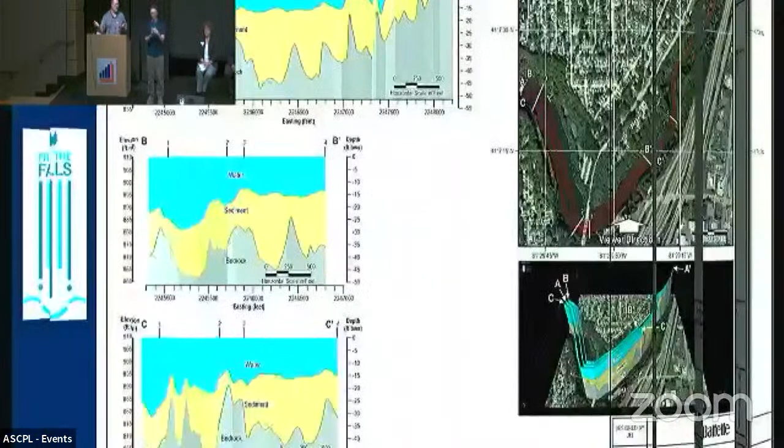And we came up with a cost at that time, I believe it was 77 million dollars we thought it would be. And we had a meeting, and as time has gone on, obviously those things have changed. But we continued forward because we had both P's: we had patience and we had these partnerships building up.

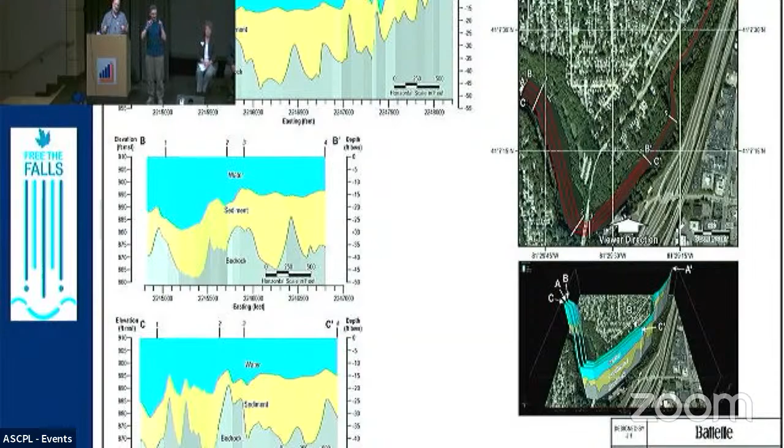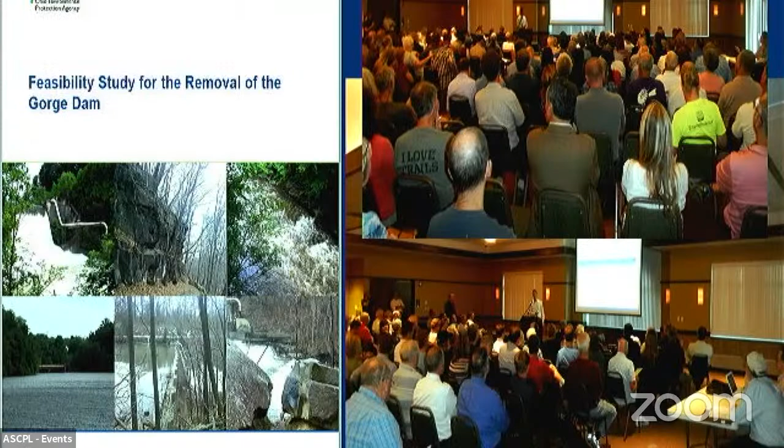As we move forward, we started asking very seriously, how do we achieve these things? So last year, we were able to go to the US EPA office in Chicago and make our pitch: hey, we got a cool project here, how much do you really want to partner with it?

And we did an application. It was reviewed, and where we are is with our partners, and we want to make sure we understand that none of this is possible without a common vision, which is let's invest in the river and restore it. The city of Cuyahoga Falls, the city of Akron, Friends of the Crooked River, and Gary Whidden were at the very beginning of asking when this was still something most folks would call a pipe dream. Summit County Metro Parks, the County of Summit, the Lake Erie Commission, and Lynn Garrity—without her emotional support, I think I would have buckled years ago. Ohio EPA, the state of Ohio, First Energy, the Regional Sewer District, and the US EPA—without this collective partnership, nothing would be possible to move forward.

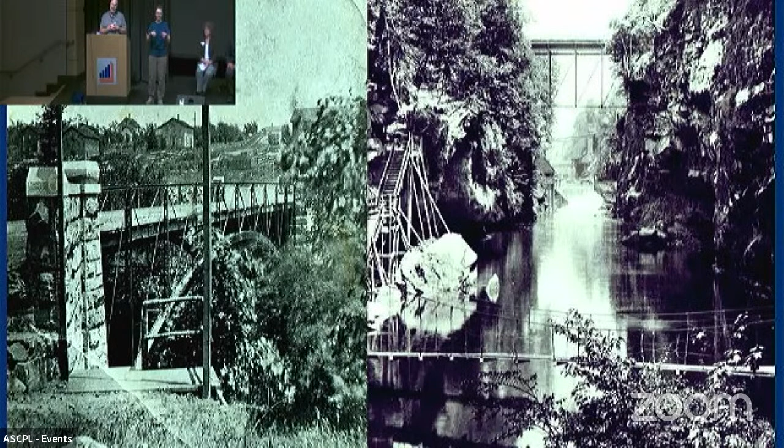So with that common vision and investment, it is my honor to say that as of right now, we have a signed project agreement, and this project is able to move forward. Our partners have come together and funded it, and through this funding, we have everyone in agreement that we want this project to happen.

I'm wearing my When Pigs Fly socks, because Steve Tuckerman and Bob Wyszynski, the folks who mentored me, that would have been their answer had we asked this question 30 years ago. But it is amazing to think of the work that has been done, and even more amazing to think of the work that will be done, and all the support that folks have given us to encourage this project to move forward, to restore the Cuyahoga River to what was once the most visited natural area in the state of Ohio.

So with that, I am going to introduce Mayor Horrigan, who's going to give some additional remarks.

Listen, the name Bill Zawitsky lives in memory for a lot of reasons, and for good reason too, because early on—not to give you a history lesson, but as we've had these—go ahead. Go ahead. That's twice. It's okay. I think I can pick back up.

Flowing southwest from its headwaters in Geauga County, the river encounters a large deposit of bedrock in Cuyahoga Falls, forcing it to make a sharp U-turn before finishing its journey to Lake Erie. With rocky outcrops, caves, and dramatic scenery, the area where the river turns towards the north has attracted visitors for more than 150 years. Coming from near and far, outdoor enthusiasts once flocked to the gorge to view the big falls of the Cuyahoga and to enjoy the amusement park rides, dance halls, picnicking, and more. That tradition continues today at the 155-acre Gorge Metro Park.

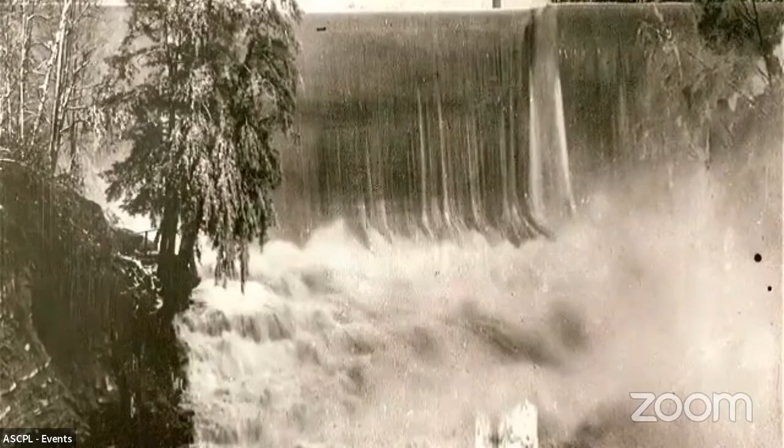But over the years, the river has faced serious challenges. In 1911, the massive Gorge Dam was built to support electricity generation for streetcars and city lights. Its construction put the famous Big Falls underwater and forever altered the landscape of the gorge. In the 1950s, the Cuyahoga had become a virtual sewer.

As the region industrialized, the river became extremely polluted. Like other rivers around the country, the Cuyahoga between Akron and Cleveland became a convenient dumping ground for raw sewage, industrial waste, toxins, and polluted runoff. Thanks to the Federal Clean Water Act and the entire Cuyahoga River community, the river has largely recovered from its polluted past. But the Gorge Dam remains.

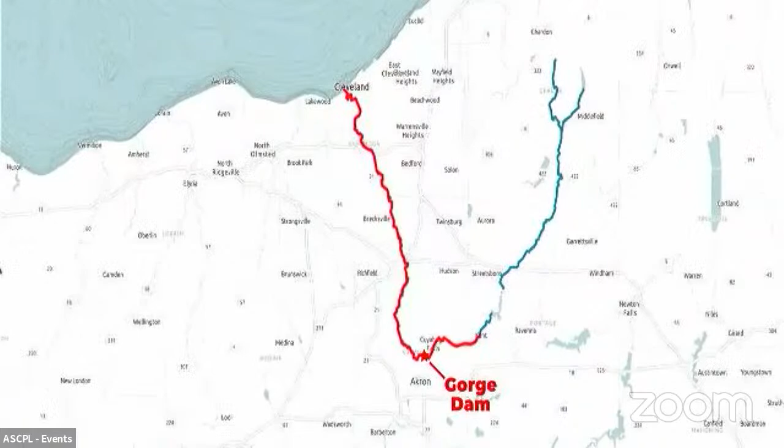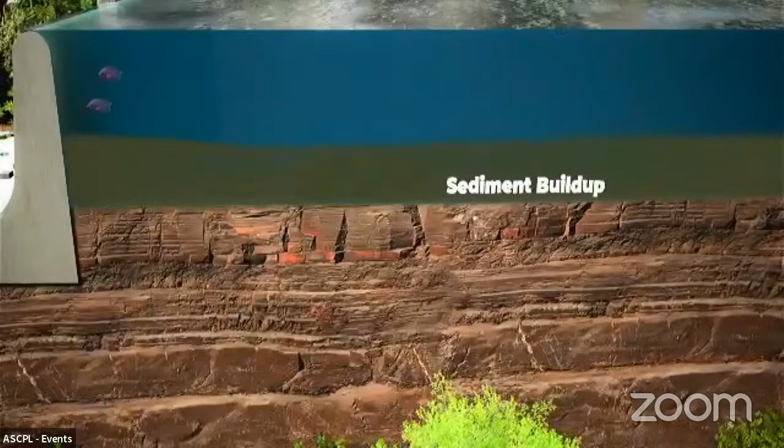Today, the 58-foot-high, 425-foot-wide remnant of the past serves no useful purpose. In fact, the dam is the only thing standing in the way of a completely free-flowing Cuyahoga River from Kent to Lake Erie. Even though dams were built with good intentions, they cause a lot of problems for water quality. In addition to preventing fish from traveling freely, dams affect the dissolved oxygen, flow, and temperature of the river. They also reduce habitat, trap and concentrate sediments and toxins, and alter the food web of the dam pool.

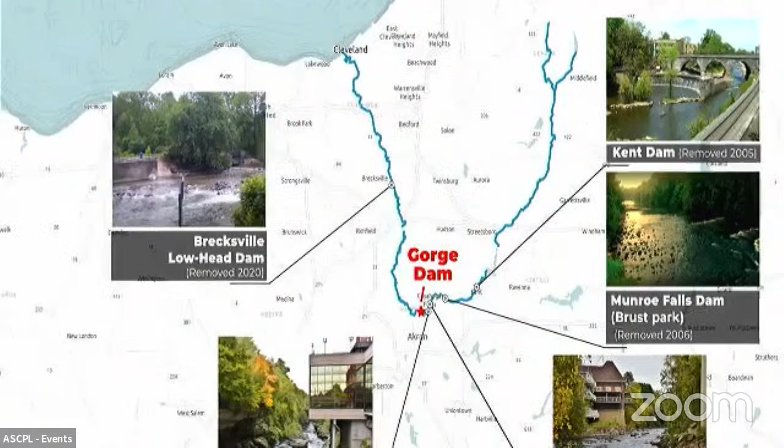Five other dams have already been removed on the Cuyahoga, resulting in nearly 10 miles of restored river. And what's good for the fish is also good for the people. These projects helped improve quality of life and drive economic development along the riverfronts in these communities over the past 10 years. That's why a large group of community partners have joined forces to free the falls at Gorge Metro Park.

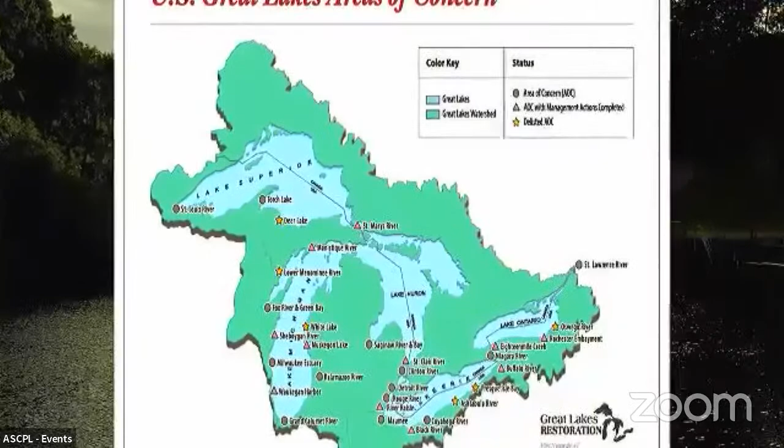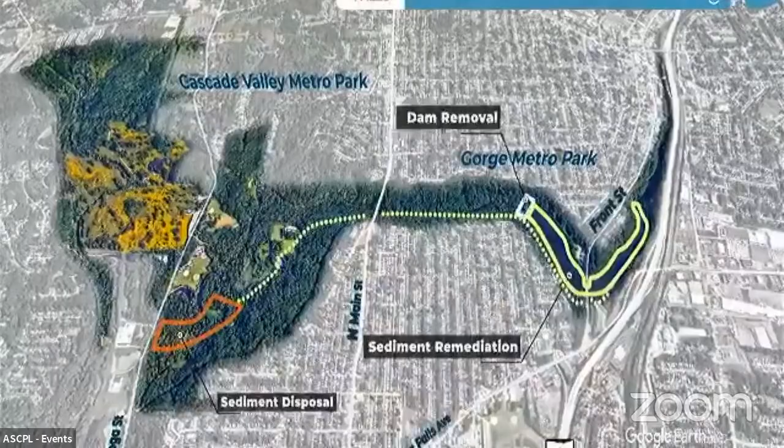US EPA intends to fund the majority of the project through the Great Lakes Restoration Initiative, and non-federal funds will also be required. A funding plan for sediment remediation, construction of the sediment disposal site, dam removal, and restoration of the dam pool is in progress.

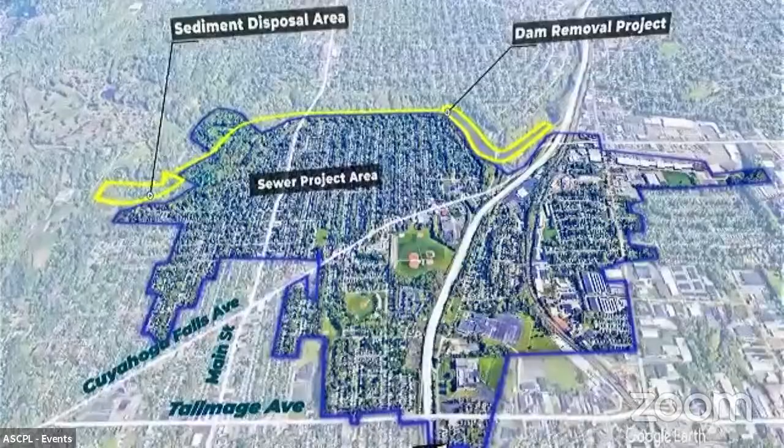Meanwhile, the City of Akron's ongoing sewer system upgrade requires construction work in the same area. While both projects are being carefully planned and coordinated to minimize disruptions to the public, there will be park and trail closures over the next several years. Although the result will be worth it, taking down a dam this big isn't easy. So how will we do it?

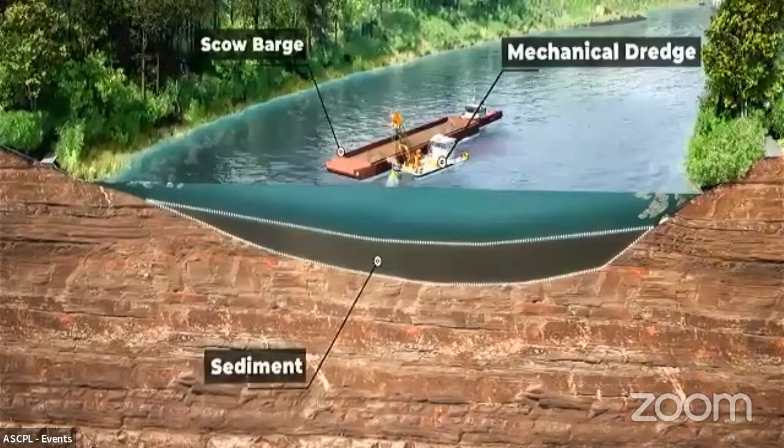First, nearly 1 million cubic yards of sediment must be removed from behind the dam. The sediment has been collecting for 100 years and contains pollutants consistent with the area's industrial past. A mechanical dredge system consisting of a clamshell bucket, crane, and scow barge will troll the reservoir, slowly removing sediment scoop by scoop. This work will likely be completed over 2 construction seasons.

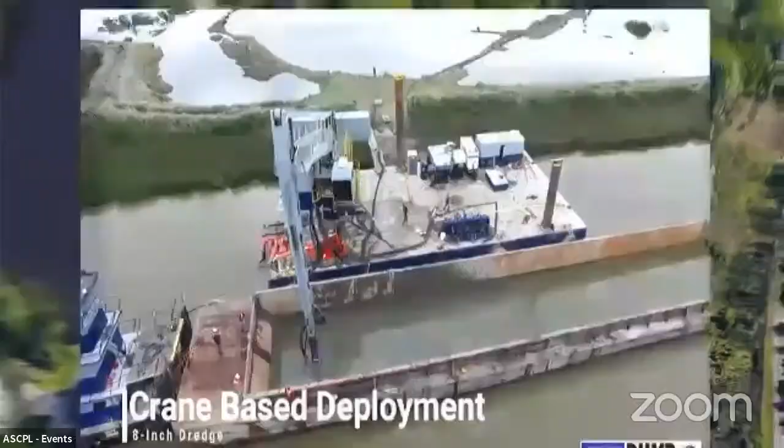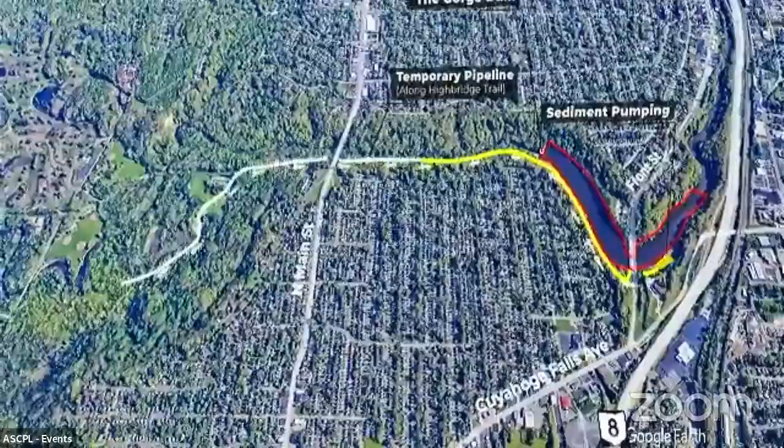Each full scow barge will then be unloaded at a staging area where it will be screened to remove any large debris. The still wet sediment will then be pumped through a temporary pipeline under the Front Street Bridge and then alongside Highbridge Trail. It will continue under the high-level bridge at North Main Street to the Chuckery area of Cascade Valley Metro Park, about 2 miles from the dam.

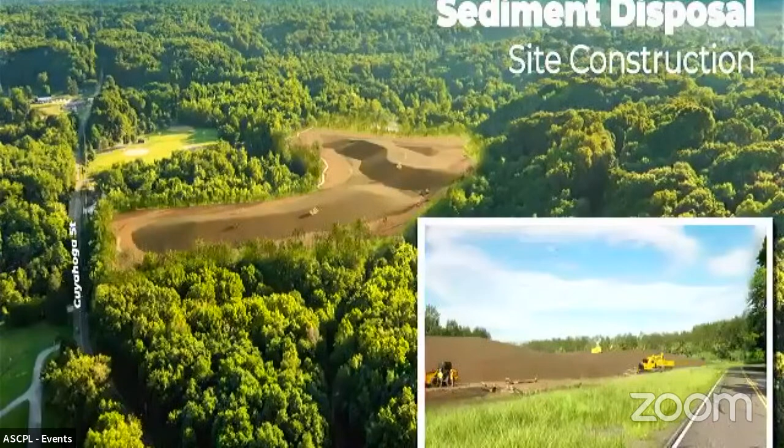The Chuckery area was historically a dumping site and will be utilized as the permanent disposal area for the contaminated sediment. To make room to store the sediment and concrete mixture, trees must be removed from a portion of the Chuckery area. The sediment is mixed with concrete in the pipeline to form a more solid material that can be contoured before it is fully stabilized. This is an innovative and safe approach that has been used at sites across the country.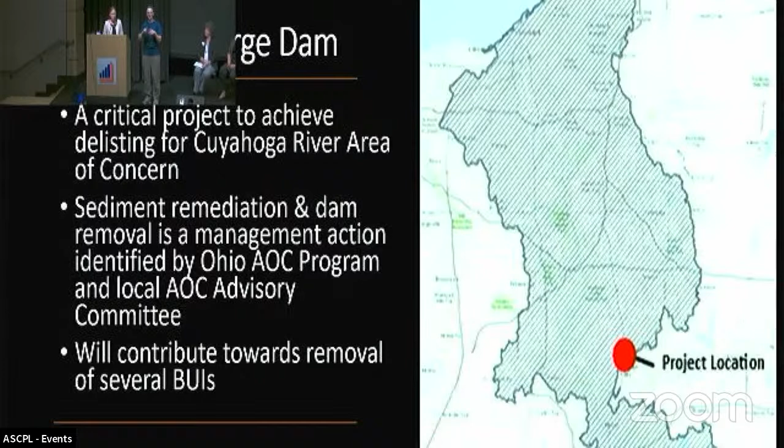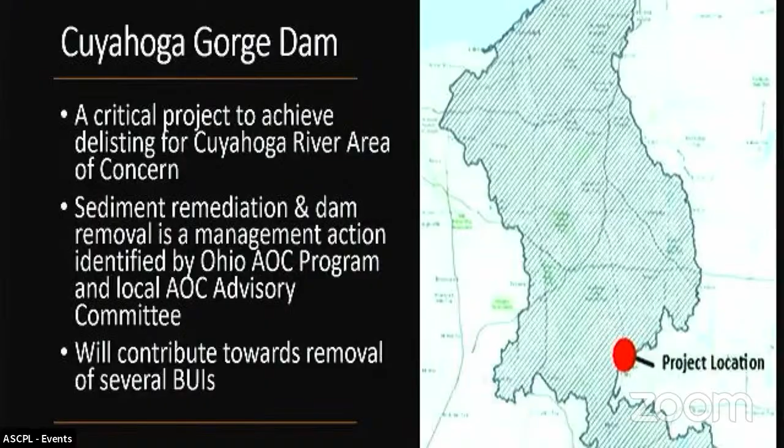So this project, the Gorge Dam removal as well as the sediment remediation piece, was chosen as a critical project by the Ohio AOC program and the local AOC advisory committee. These projects together will address several BUIs, or beneficial use impairments, that have been determined as impaired within the area of concern. And by addressing those impairments, it'll ultimately lead to the delisting of the area of concern itself.

So now looking at why we have to remove the sediment, it goes to show that there's a lot of sediment here. We're talking, as Bill had mentioned, close to 900,000 cubic yards. We aren't able to just remove the dam and let all of that sediment flush downstream. So either way, regardless of the contaminant levels within the sediment, we would have to figure out where to put this.

But because of sediment characterization and sediment sampling that has occurred previously, we've been able to determine that there are some contaminants within the dam pool itself. When I say dam pool, since I'll be using that phrase a lot, that's essentially about 1.5 miles upstream of the Gorge Dam itself. You can see in that figure, and I have another one I'll show shortly that shows the footprint better, that within that dam pool the sediment thickness is anywhere between 1 to 34 feet. So there's a lot of sediment there that needs to be removed.

And within that sediment, there's PCBs, PAHs, oil and grease, and heavy metals, but at low levels. Something Bill had mentioned is the 'ick' within the material. I want to emphasize this because it's important: the contaminants are at a level at which we need to address them and dispose of them and handle them appropriately to remove that human health risk as well as risk to fish and wildlife populations. But the good news is that they're not at as high a level where it's necessary for us to categorize them as hazardous waste, or waste that needs to be treated under TSCA or RCRA, which are regulatory programs. So it's dirty enough, or icky enough, that we need to dispose and handle it properly, but it's not icky enough to be categorized as regulatory or hazardous.

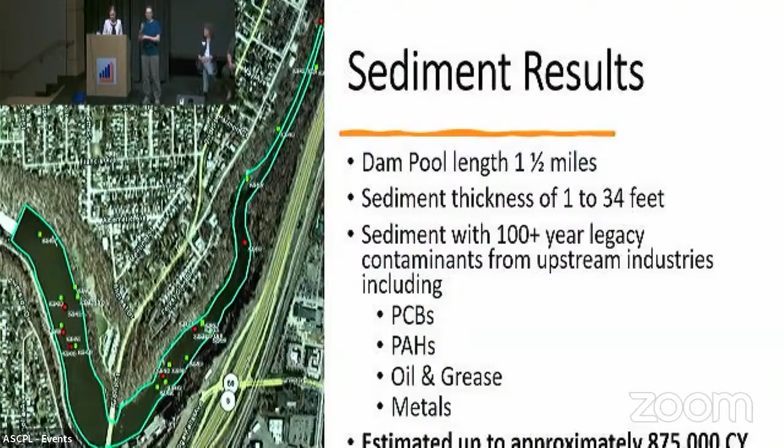All right, so I think the video did a great job walking through all of this, but I'll go through it again. This is showing the remedial action footprint, and there are some key components on this figure I'm going to point out. The main point is what this is showing is where we're taking that material that's dredged and where we're placing it. Let me see if I can get this to work.

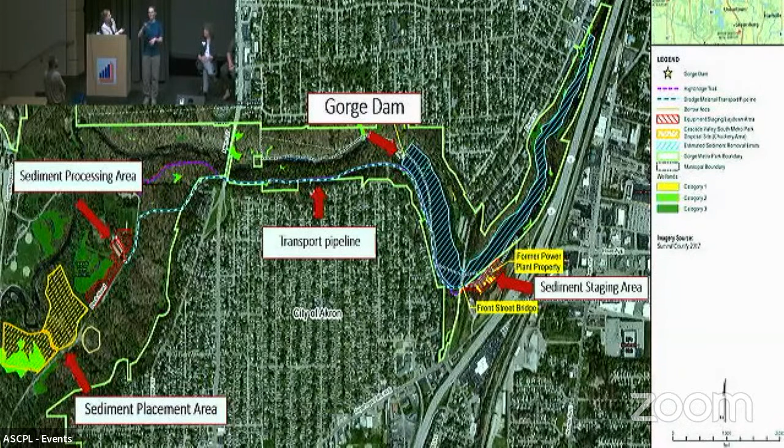Okay, so the dam pool itself, this is where the dredging is going to occur, is that area in light blue, 1.5 miles upstream of the dam itself. As shown in the video, this is going to be mechanically dredged. There's essentially a clamshell bucket that's going to go in, get lowered, and bucket by bucket that material will be removed and placed on a barge.

That barge will go to the sediment staging area, which is the area outlined in red here, where the former power plant used to be. From the barge, the material will be removed and placed in the sediment staging area, where the larger debris will be screened, and the dredged material will then go into temporary pipelines. The pipes themselves are about 8 inches in diameter, there are going to be 3 of them: 2 active and 1 on standby.

As the video mentioned, the pipeline route is going to go from that sediment staging area, under Front Street Bridge, along the High Bridge Trail. You can follow the dotted light blue lines across. There's approximately 2 miles that these pipelines are going to run. There are going to be booster pumps in between that help keep that dredge material moving until it gets near Peck Road, where the Cascade Valley Park and the Chuckery area lead to this sediment processing area.

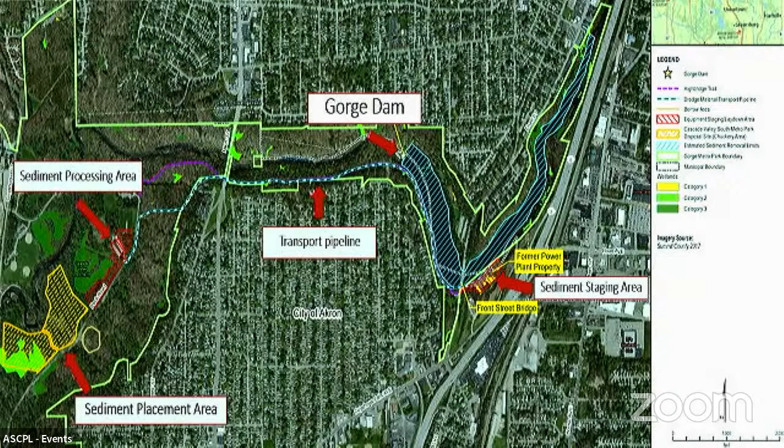In the next slide, I'm going to go into a little more detail on what happens there. But from the sediment processing area, the sediment, now stabilized dredge material, gets placed within the sediment placement area, which is the area outlined in orange.

So it's not new worldwide. It's been used for other projects, but it's new to our program. The benefits and why this alternative approach was chosen versus others is because of the limited space we have within the Chuckery area. I can jump to this slide to give a sense of the area we're working with.

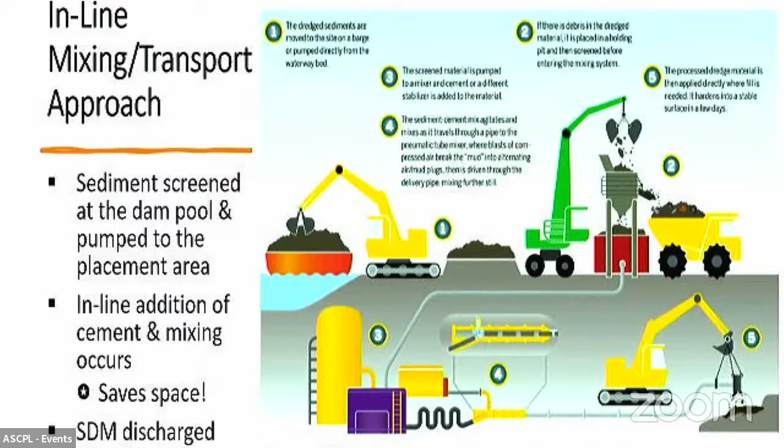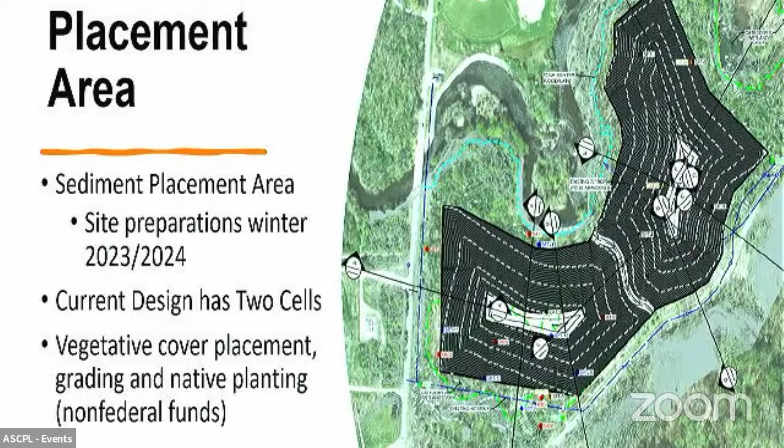As I mentioned before, this is the sediment placement area. I'll cover it more on the next slide, but there are a few projects occurring within the next few months, and this is where one of them will occur. Preparations should begin this winter, 2023 and 2024, to prepare the sediment placement area for construction contractors once they're on the ground, hopefully spring or summer of next year. That space will be ready for material to be placed there.

Right now it's a two-cell design, and around the perimeter there are stormwater ditches, including one going through the middle. As the video showed, the cover of the sediment placement area itself will use native material. A native seed mixture will be planted on top, and it'll be contoured so it looks similar to the nearby habitat as well.

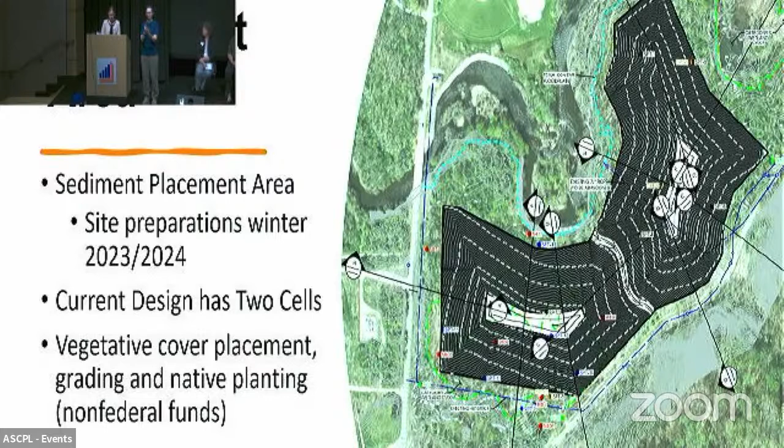Those additional projects I mentioned: for the sediment placement area, the City of Akron, with funding from Ohio EPA, is going to begin work this winter, 2023 and 2024, to prepare that site.

In addition, this might be an area you'll be able to see from Front Street Bridge - the former power plant space, which will be the future sediment staging area. If you go past Front Street Bridge now, you can see a lot of metal left over, remnants of the power plant itself, and there's sheet pile wall there.

All of that is not stable enough for the dredging contractors to work on, and not stable enough for us to have that staging area in place. So there's going to be work occurring, again over 2023, 2024, so it's ready to go by spring and summer when the remedial action contractors are on board. That will also be led by the City of Akron through Great Lakes Restoration Initiative funding.

And also something you might notice from Front Street Bridge, tree clearing is taking place just to the west of the outfall from Front Street Bridge. The reason for this is because the construction contractors are going to need access to the dam pool upstream of the dam, and a lot of their equipment is too tall to go under the bridge.

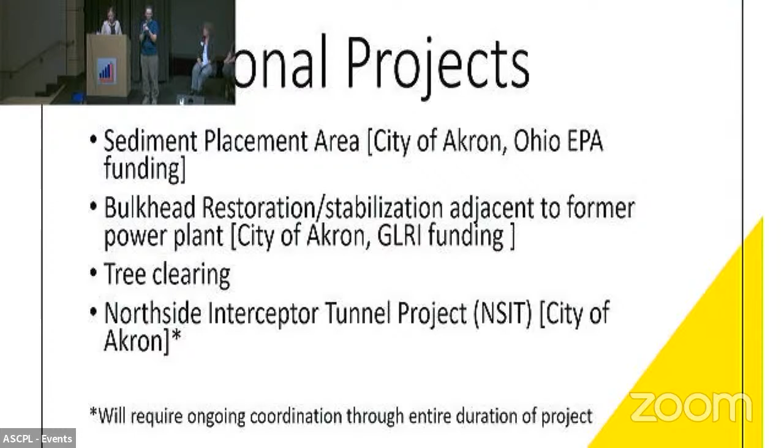I know there's been a lot of talk tonight about partnerships, and I know that probably seems like it's said a lot. But just looking at a project of this size, not only with the volumes that need to be removed, but the money that's needed to do it, this really wouldn't be possible without these partnerships. So I just want to give a big hats off to a lot of the folks that have been working on this for a long time to get it to this point.

It takes a lot of phone calls, a lot of meetings to have this list here of folks. I just want to emphasize that it takes a lot of work, and I'm really happy to be a part of this great community and partners that are working on the Gorge.

So the difference is: there are the non-federal sponsors. We have Ohio EPA, City of Akron, Northeast Ohio Sewer District, and the First Energy Ohio Edison Company. These are the non-federal sponsors, the signatories of the project agreement that we're celebrating today. Within that project agreement, they have cash and in-kind contributions that they are committing to for this project.

In addition to that, there are also cost share partners. We have Ohio Lake Erie Commission, Summit Metro Parks, City of Cuyahoga Falls, as well as Summit County. All of these partners have also contributed cash and in-kind services to get this project done.

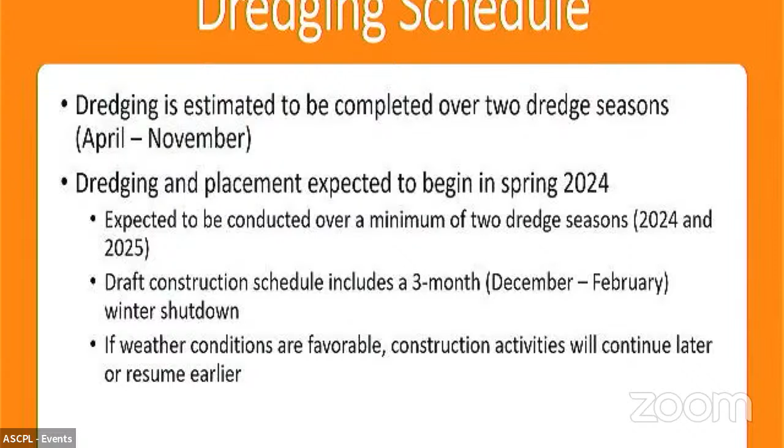All right, dredging schedule. So the dredging itself, we're anticipating to take 2 dredging seasons. A dredging season is going to be approximately April through November. So we're hoping to begin next spring, early summer 2024. And the 2 dredging seasons then would be 2024 and 2025. There'll be about a 3-month interim for the winter season where we'll have to demobilize and shut down.

I just want to highlight that because that's something that could potentially change. We never know how weather is going to be, we can't predict that. So next year, if there's a warm winter or slow start, we might be able to work longer into the year and get done faster, which would be ideal. But we'll see if Mother Nature cooperates with us.

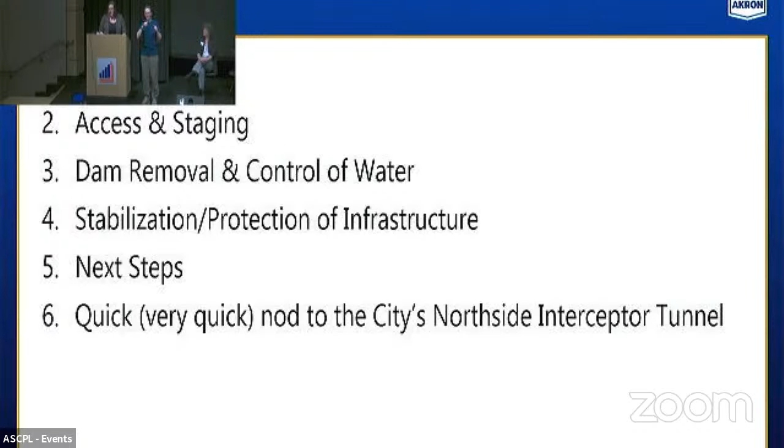So our design actually includes removal of the concrete structure. And like I said, we're also looking at stability of infrastructure within the dam pool - Front Street Bridge, storm outfalls, and what happens as the water level is lowered. At the end of our design, we'll also be looking at river restoration, what needs to happen to the river, if anything, once the dam is down and once the water level's lowered. Our project team is led by GPD Group with assistance from AECOM and GEI consultants, and our funding is through US EPA's Great Lakes Restoration Initiative program.

So right now we're at 50% design. In the coming months, we'll be moving to 90% design. So the slides that I'm showing tonight are based on the 50% design. That means that it's not necessarily final and that things could still change.

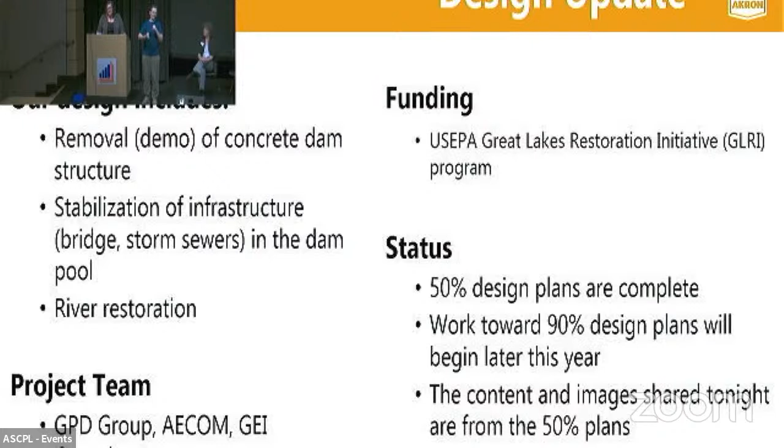Starting off with one of the most challenging aspects of our project is access. We need to be able to get from Front Street to the dam. You'll see a lot of green areas - those are our proposed staging areas. The reason that we have so many is because as we lower the water level, we'll be changing the whole site. We'll be gaining land and we'll be reducing the amount of water. So we need access on both sides of the river. We need access through the river.

Starting on the north side of this figure, Gorge Metro Park, the main parking lot, is one of our main access areas. We'll be using the Lower Gorge Trail, widening it slightly so we can get trucks and construction equipment to the north side of the dam.

We'll also be using the Highbridge Trail parking lot for barge access, going in using barges from Highbridge Trail through the dam pool to get down to the dam. On the south side of the river, we'll be using the Highbridge Trail parking lot and the Highbridge Trail, shown in purple, to get down to the south side of the dam.

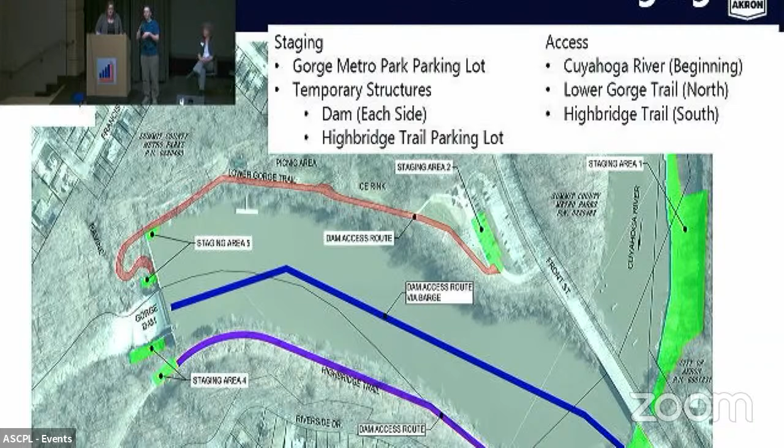The Highbridge Trailhead parking lot is pretty small, so since we have to launch barges from there, we'll be improving it, meaning expanding it so we can launch barges. We'll also use that site to unload barges and load debris or supplies into trucks to get them out to Front Street Bridge. This area will be removed after construction; it's a temporary build-out just for our use during construction. One benefit of this site is that it's downstream of Front Street Bridge, so we don't have to worry about the clearance issue under the bridge.

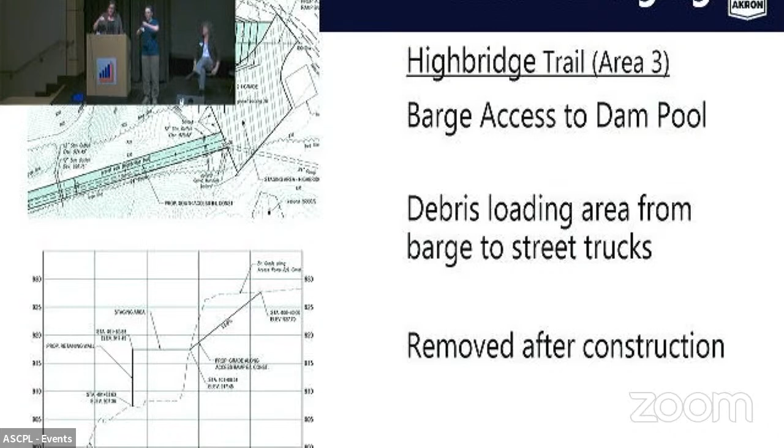Our staging area on the north side that we're going to build out is just off the Lower Gorge Trail. We'll be using this site for a crane setup, and also as a turnaround area for trucks or construction equipment so they don't have to back down the very long trail to get out to the parking lot. That's not very safe. This area will also be removed after construction and restored.

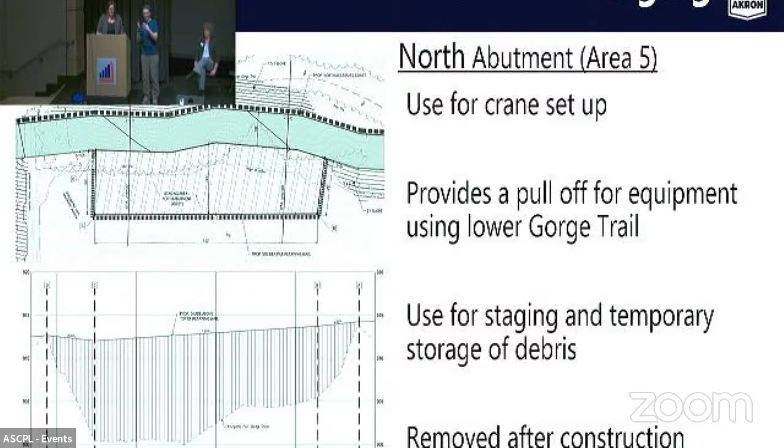So how will we actually remove the dam? We have a lot of things to consider because we live in Ohio, and we have weather variations—wet weather like April and dry weather like July—which we have to plan for in our design. The other thing we have to accommodate is ODNR requiring us to meet a drawdown limit of 1 foot per week, so we can only lower the water level 1 foot per week. This is something we have to consider as well.

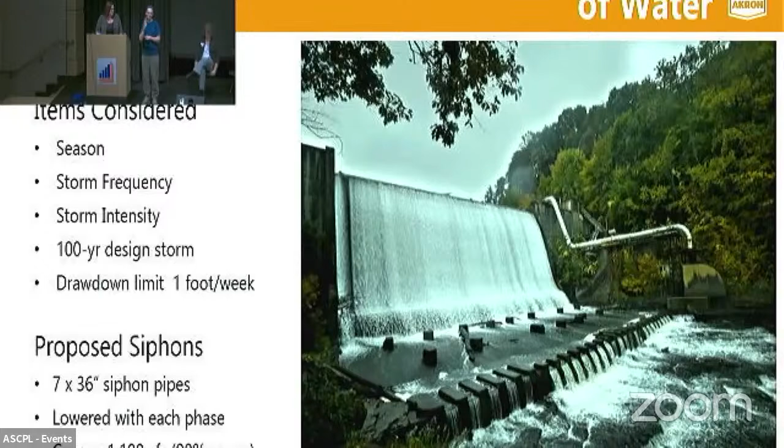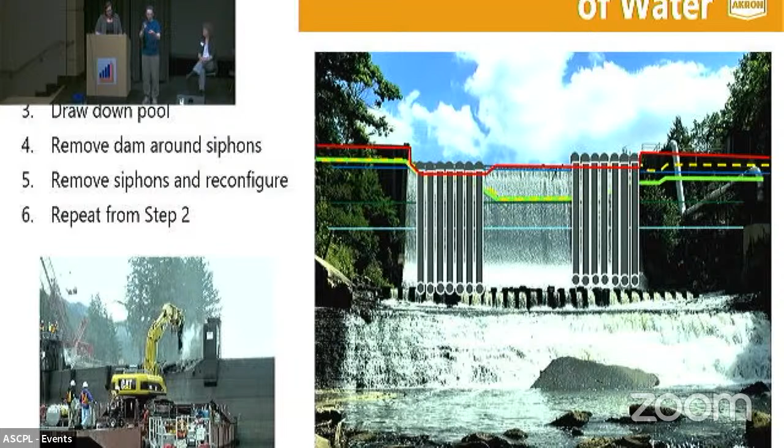What we've come up with is siphons, which we'll use to lower the water level. This figure shows the siphons—I won't explain the different colors, but we'll be using a mix of notching. We'll notch the dam, place the siphons, remove that portion of the dam, then replace the siphons and notch again, going through that sequence four times. There's a fifth part of the sequence that doesn't require siphons—once the dam is low enough, we won't need them and will just remove the remaining dam structure accessing from the riverbed.

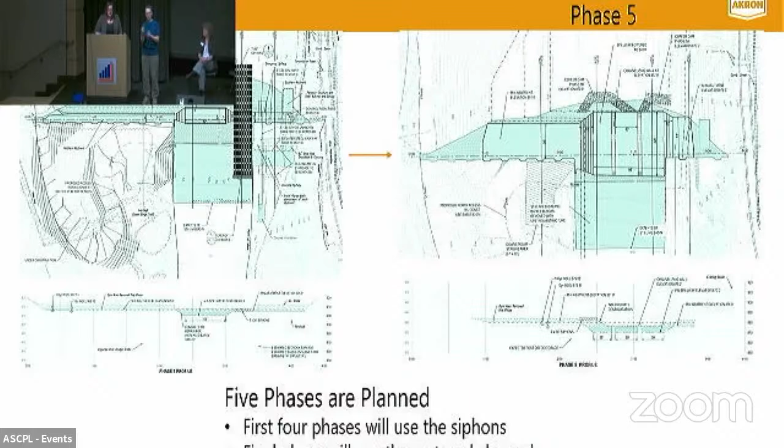I mentioned Front Street Bridge earlier, so we're looking at Front Street Bridge and the stability of it, as well as the stability of the roadway crossing it. Right now we know the north side of the road needs to be stable, and that needs to be addressed as part of our design. We're looking at what that means and how it can be implemented, and we'll definitely be monitoring the roadway and the bridge during construction.

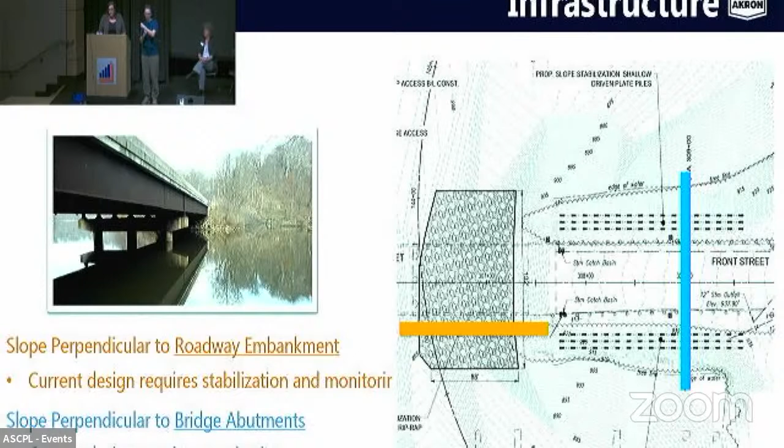Other considerations in the dam pool are the stormwater outfalls—the pipes bringing rainwater down into the dam pool. Right now they're very high. When our water surface goes down 40 feet, we need to make sure the riverbank is stable and that we're not causing erosion by Front Street Bridge. We're looking at this as part of our design, whether we need to stabilize the riverbank or lower the pipe. We've also been working with US EPA's design team on the former power plant site, as Courtney mentioned. This has been a collaboration between the different construction projects to determine who's doing what, to make sure the site is stable as we remove the sediment around it and lower the water level.

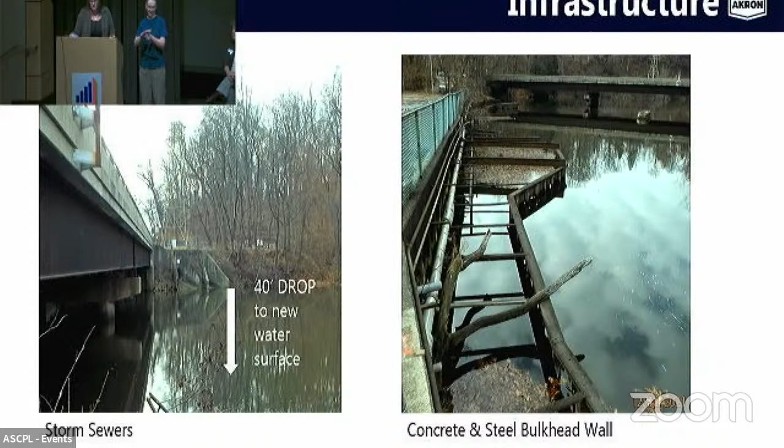So our next steps: we obviously need to complete our design. We'll use that completed design to apply for construction funding for the dam removal project, and then we will begin construction, hopefully in 2026. So Courtney and I were on the same page with the year.

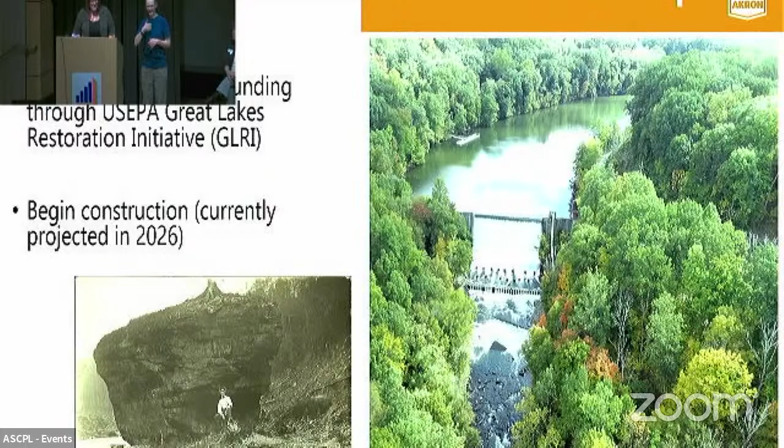I wanted to mention the Northside Interceptor Tunnel project. This is part of our Akron Waterways Renewed program to reduce combined sewer overflows to the Cuyahoga River. We're obviously improving water quality with this project as well. We talk about them together because they share a project area, a schedule, and lots of meetings and coordination.